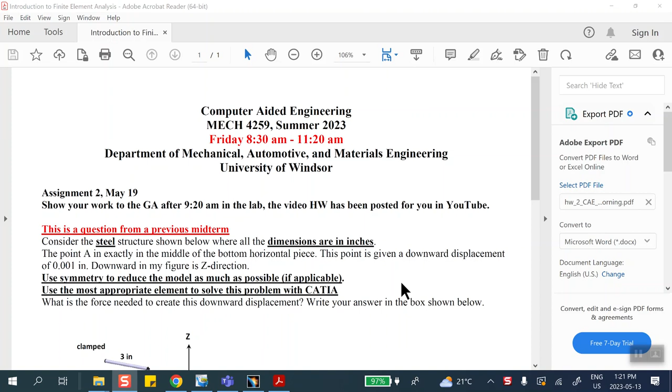So here's the situation: you're given this configuration, and you are told that the ends of the top pieces are clamped.

The middle point of this horizontal piece is being pushed down by a thousandth of an inch. You're asked to use symmetry to reduce the model as much as possible and use the most appropriate element.

As soon as you see this, you should realize that this needs to be done with beam elements, not with solid elements. Do not go and try to create a three-dimensional drawing where you draw the line and then pad it, etc. This has to be done with beam elements, and therefore all you need is the wireframe. Wireframe means a line. That's pretty much it.

Now, when you look at this problem, first of all, you don't know what the force is to pull this thing down. That much we know. We also know that because of the nature of the problem and the loading, this has a plane of symmetry which is xz. So do not model the whole thing. Model only half of this, which means that you're cutting it with the xz plane.

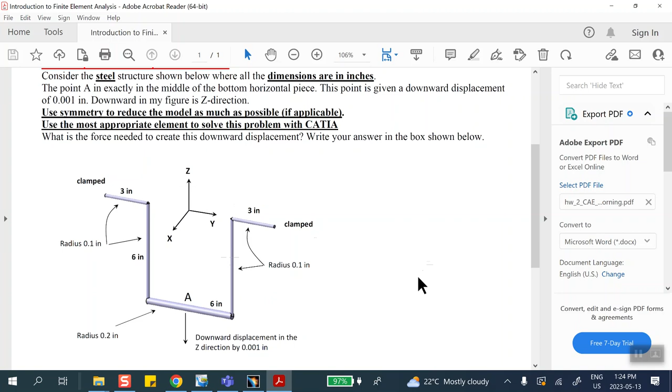Now, in class I told you there are different ways of creating this wireframe. Because this present problem, this entire thing lies in a single plane, for example something parallel to YZ, I can do that as a sketch. But remember, if you do it as a sketch, you have to come back and join it. Do not forget to join. On the other hand, you can also do this thing in space as a line and another line, etc. So that is the other option to do it. We have done both ways in class. I'm not going to do it here.

This particular problem, I'm going to do as a sketch. If you want more practice, go look at homework number 2 for the afternoon class, where this structure is not all in the same plane. So there you have to go and create the wireframe in space. All right, let's go ahead and do that.

I will model only half of this, instead of modeling the whole thing and then trying to cut it. So on that vertical plane, I will sketch this thing that essentially is half of that geometry that you see there.

Now I noticed that, for example, inadvertently I put this thing to the left of that. That's okay, I'll fix it. That point, control this point, I'm going to make it coincident, etc. All right, let's go ahead and put some dimensions here.

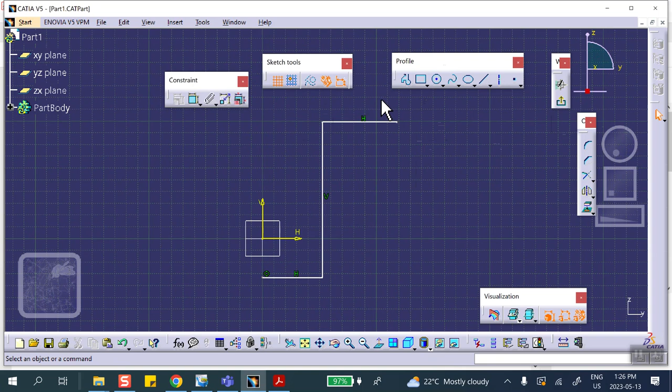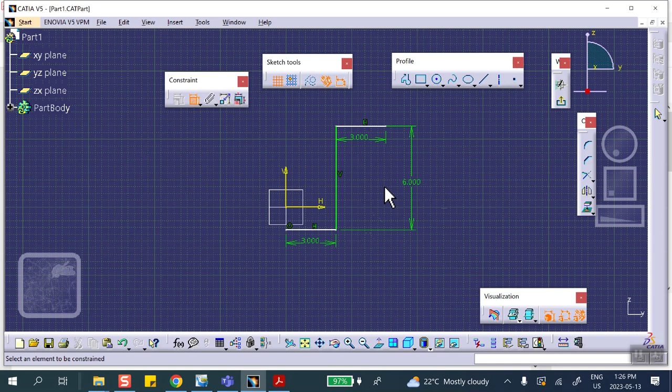So let me see. This is 3 inches. This is 6 inches. And this is also 3 inches. Very good. Now the reason these are white is because this is not fully constrained. I really don't care as long as you do the problem. I don't insist that everything be fully constrained, but anyway, that's what it is. So exit.

This is generated in a sketch. In order to be able to do this with beam elements, you have no choice but to join that sketch, otherwise you won't be able to mesh it. And I want to remind you how we did the joining.

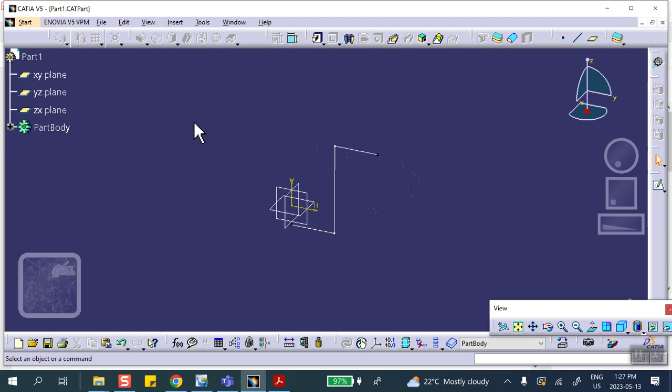The joining cannot be done in part design. You either have to do it in generative shape design, or you can do it here. So start mechanical design all the way. Let's see, third from the bottom, wireframe and surface design. This is the baby version of generative shape design. For our purpose we can do it here, but I'd rather take you into generative shape design.

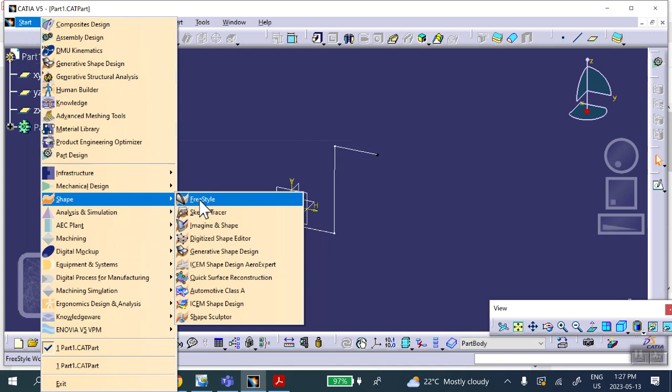Let me see... under shape, yeah, shape workbench. The fifth one from the top says generative shape design. You click on it, and all you need to do is get the operations toolbar.

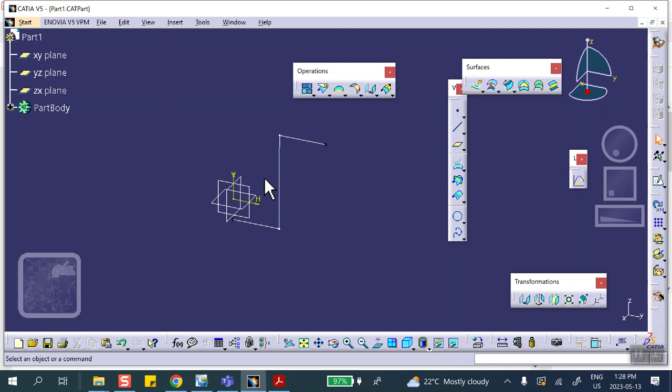This is the operations toolbar, and the one on the very left is called join. You have to do that, otherwise you won't be able to mesh this with beam elements later on, since it was done in a sketch. You click on it, select that sketch, and that's pretty much it. Nothing else you need to do here.

Now we can go to part design if you want and apply material, or we can do it here. It really doesn't matter, so I'm going to do it right here. Apply material - this is made out of steel - apply it to the part and close it.

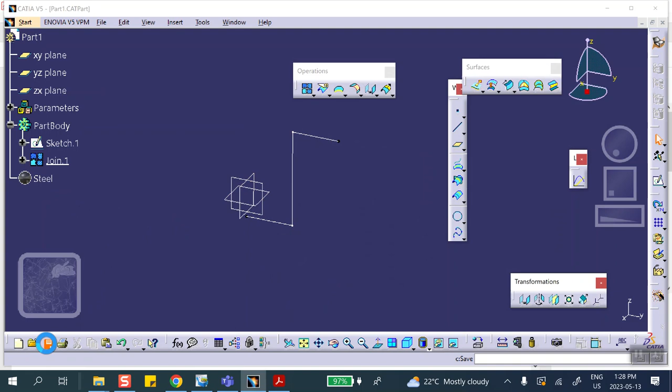We save this by clicking on the floppy disk, and then we're going to go to the usual analysis and simulation, generative structural analysis. You click on it. It is a static analysis that you're doing.

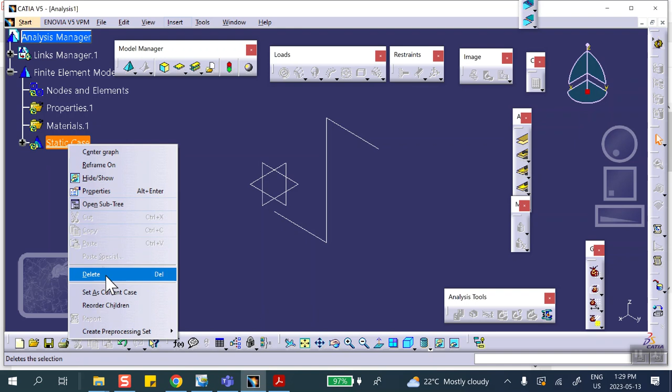Remember, I told you that if you accidentally delete this static case line, you can put it back in as an insert. I don't have it here, but let me do that. Let me on purpose delete this for you - I don't want to do that, but on purpose I'm going to. Then you can always say insert static case. The reason I can't do it right now is because I haven't meshed it properly. That's what it is, so undo this.

Just be careful not to delete this. So first thing we're going to do is mesh it with beam elements right there. Under model manager, where the traffic light is - under the model manager - you expand the icon to the left and use beam element.

Remember, CATIA, when it sees a solid object, meshes it with these elements. There is no solid object here, so you have to do it yourself. You click on it, select this, and notice that it selects the entire thing because we joined it.

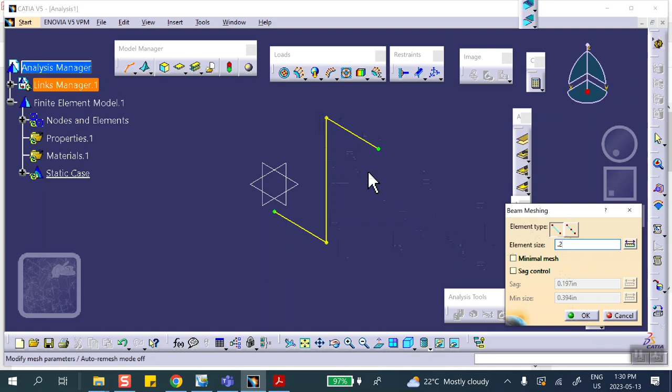You say okay. Now would you like to see the mesh? The usual thing, you put the cursor here. Notice that the beam element is created, but it doesn't show it to you. Right-click, mesh visualization, nothing fancy. If you put the cursor, you see there are element numbers and node numbers. The one in the middle, let me zoom in further - this is element number 36 going between node 39 and 38, etc. Nothing fancy. Deactivate this.

The next thing is we want to put a cross-sectional area. Now, because it's a circle, you don't need an orientation point. How do we do this? This is the 1D property. In the model manager, 1D property, you click on it. It asks, what is it that you want to put cross-section on?

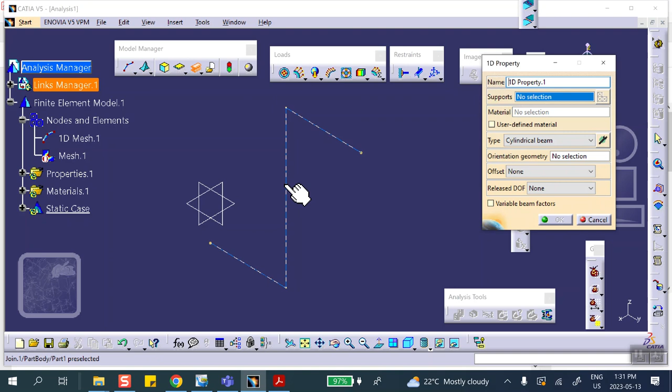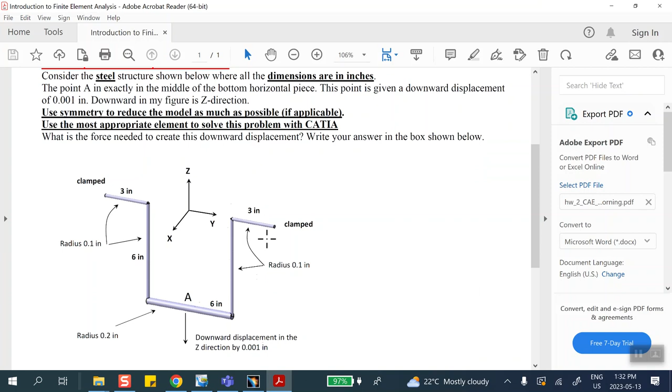We select this, and because it was joined, it's going to put the same cross-section on all of them. It's a cylindrical beam that I want. Click on the wrench and put down 0.1. Notice that the cross section of these two pieces is different from that - the radius here for these two pieces is 0.1, and for this piece is 0.2. So the way we're doing it, we put 0.1 on everything, and then we come back and make a change for this bottom one.

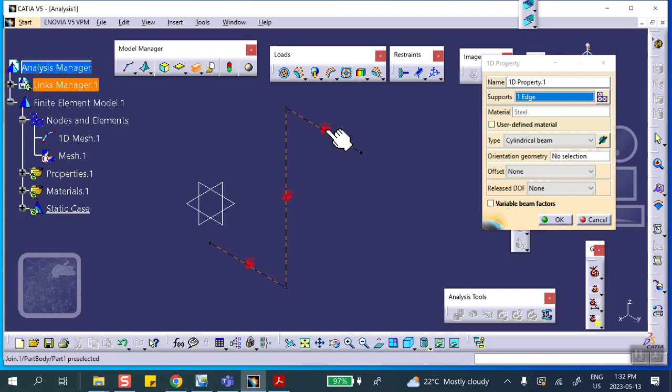Okay, so 0.1 on everything. We notice that we can close it, by the way, because the cross section is a cylindrical circle, and there is no orientation point needed. We say okay, and if you zoom in, you can see the circle right there, and it's the same size circle.

However, we know that this has a different cross section - the radius is 0.2. So how do we do that? We put the cursor, open up the properties toolbar, the properties branch right there. Put the cursor here on the 1D property, right-click, and towards the very bottom it says local 1D property. You click on it, it says, where is it that you want to change? It's this piece that I want to change, and what radius do I want to give it? I want to give it the radius of 0.2.

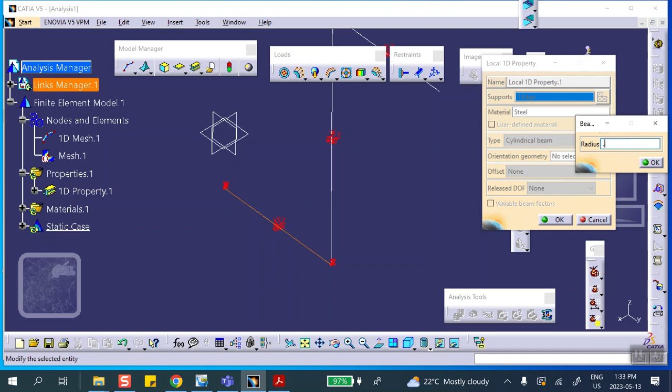So now you can see these two pieces, this one and that one, have radius 0.1, and this one, because we changed it through the local 1D property, has radius of 0.2. Don't let this thing bother you, because this is what we put there initially, but then we went and changed it, and it put these things there.

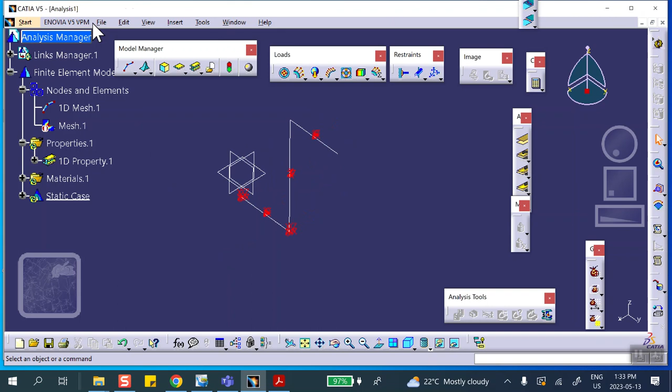Very good. Save the analysis before we run ourselves into trouble in case the power is lost or in case we have to kill the job. So we go File, Save Management, Analysis, Save As. In that same folder, Lab 2, Homework Morning, Analysis 1.

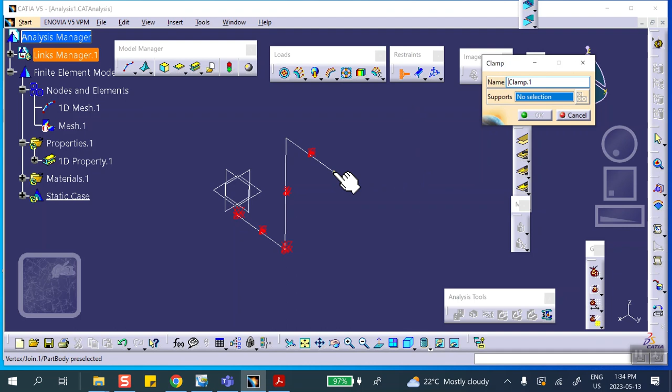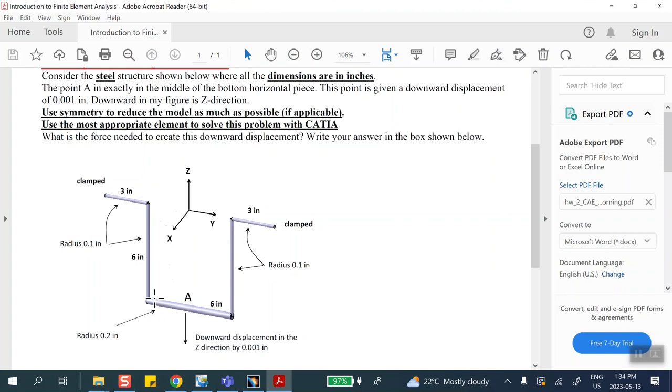Very good. Now, we are told that this point is clamped, so click on the clamp and select that point. Okay, that much we know. We know that this point is on a plane of symmetry. Now, if it's bothering you, I can always hide these properties right there, local property there. So this point is on the XZ plane of symmetry. That means no displacement in Y, and rotations exactly the opposite.

So let's go do that. So we click on this. Okay, and on purpose, let me uncheck all of these. On purpose, I'm going to call this symmetry condition - you'll see, because this is going to help me identify something later on. Symmetry condition.

So no displacement in Y and rotations opposite. So opposite means that if these are unchecked, they're going to be checked now. Obviously, this one is checked, this is going to stay. This is symmetry condition for beams.

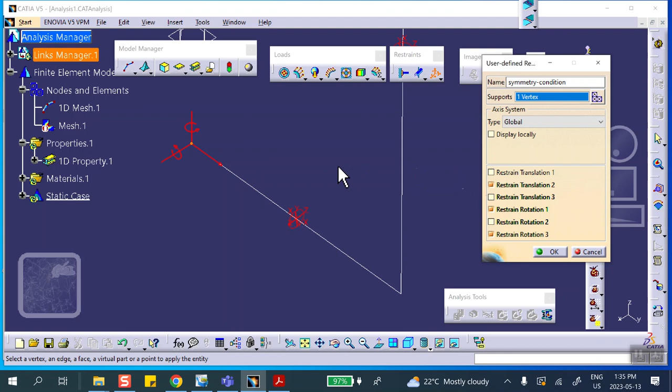We say okay. Then I want to take that same point and pull it down by a thousandth of an inch. So in order to remember, in CATIA, if you want to give a non-zero value for displacement and enforced displacement, first you have to make it 0, just so that I don't mix these up, because this one is for symmetry.

First thing, I'm going to select that same point and say displacement in the direction Z equal to 0. And on purpose, I'm going to call this thing pulling down. You can see that - I don't want to mix these up because it's a recipe for disaster.

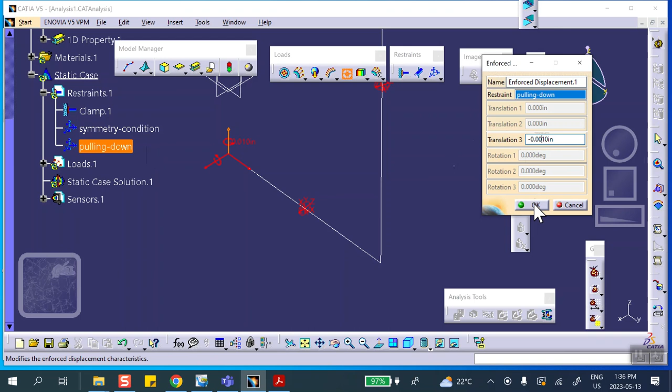You say okay, now I go and change this thing to 0.001. So go to the enforced displacement in the loads toolbar right there. In the loads toolbar, you click on it, it says where is that thing that you want to change? I go and select the pulling down, and I put negative 0.001. Okay? Negative 0.001. We say okay.

Save this and run it.

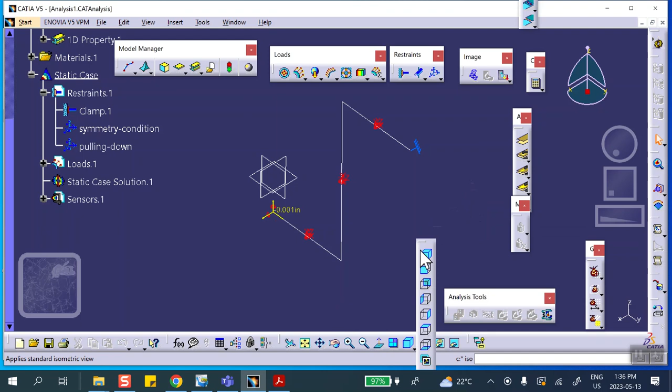Nothing fancy. Let's look at the view from the front, by the way - this is a 3D problem, so anyway, look at the front. Look at the deformation. Yeah, you expect something like that to happen, right? Yeah, because this is on a symmetry plane, it doesn't go to the left or doesn't go to the right, etc. If you want to know the values, click on it.

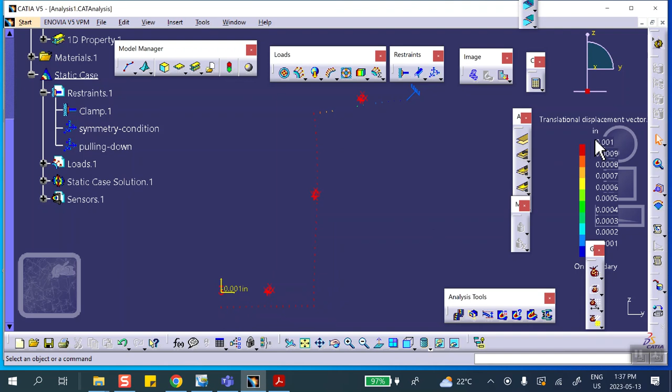Notice that we applied 0.001 here, right there. And then for the other ones, if you want to change the color rendering, you go average ISO, and there we are. Okay?

Now, remember, in CATIA, you cannot display stresses directly. You can display the principal stress, and the only principal stress that it will give you is the axial principal stress, which is kind of useless for bending purposes. You see that? It'll give it to you - it'll give you one component of stress, and it's going to be the axial one. Okay? Yeah.

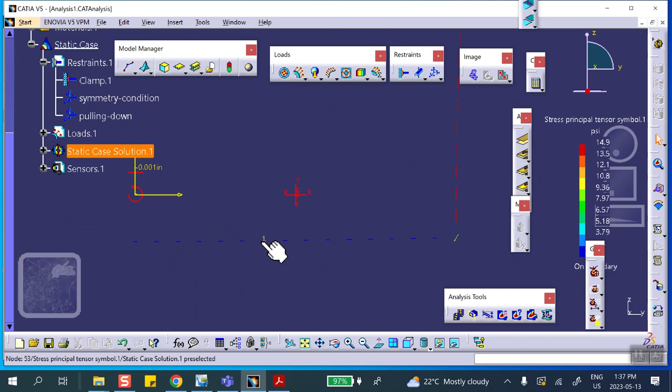Good. The rest of it is here. Notice that this one has pretty much, let me see now - this one has a very small axial stress. See that?

Now, mainly because it's thicker, right? It's a thicker beam. Let's deactivate this.

The last thing is, remember, this was a test problem. We gave you a box like that and said write down your answer in the box. What is the force needed to pull this point A down by a 1,000th of an inch? You have to write the right number here.

Now, so we go put the cursor on the sensor. We go to the second last, then reaction sensor. It says, okay, where is it? Well, it's the pulling down thingy, right? And you say update, and you're going to get a point, almost half a pound.

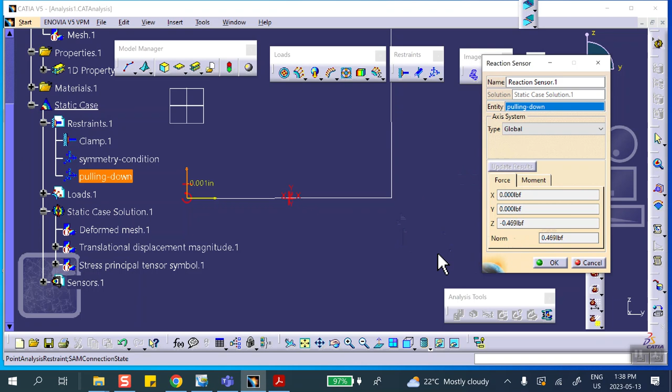0.469 pound. So first of all, don't cancel this because I will not be able to see that. Let me show you. Cancel it. It's not going to appear here.

Let me try it again. Right click, reaction sensor, pulling down, update, 0.469. Say okay. Don't cancel.

Now, because when I mark your paper, I can go here, double click on it, and find out where you got your number from. Now, the number that goes in this box is not what's there. It's double of what's there. So you can write 2 times 0.4, whatever it was, 2 times 0.469 or 96, I can't remember.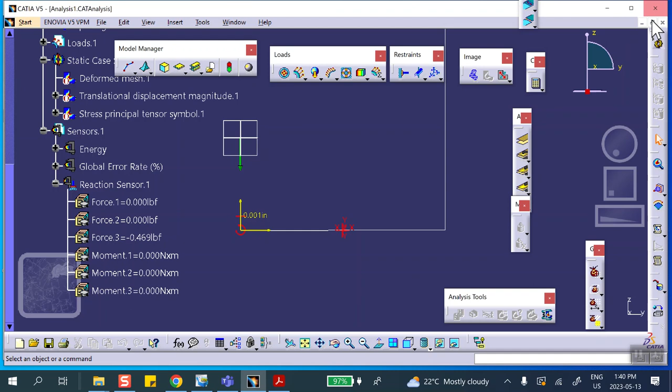First of all, I'm going to kill this join. I keep this though, okay? So what I'm going to do is go to... on purpose, I am going to actually redo this. How about that? Yeah, on purpose.

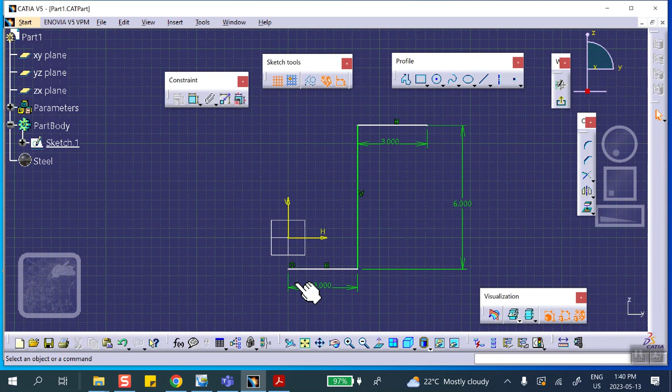So as a matter of fact, let me delete this join. Let me go to the sketch. There's my sketch. And on purpose, I'm going to draw that as a full line, okay? So make this thing 6, there. And I do the rest of this.

The rest of this I can just mirror. So this line, control that line. Control that line. I'm going to mirror it. Let's see if we can find the mirror. Is this the mirror? Yeah, mirror it with respect to that.

Because I'm just too lazy to do it. Now notice that the reason I actually extended this line, I didn't want to break there, is because I don't want to have a point at that location. Okay? That on purpose complicates things a little bit.

If I had done just mirror of everything, including that piece, then there would have been a point here that I could have used later on. But on purpose, I got rid of it.

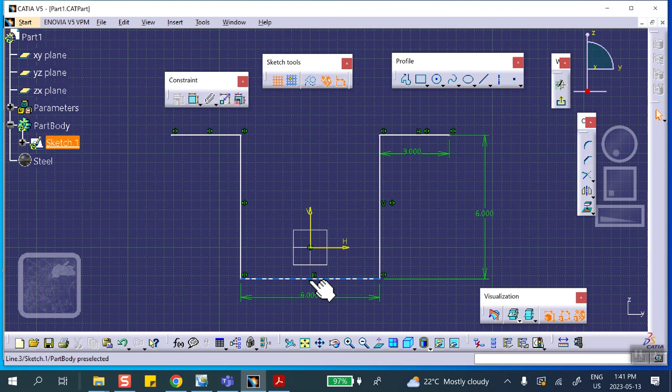Exit. Okay. Let's join it. Still have to join. Material is already there. Okay.

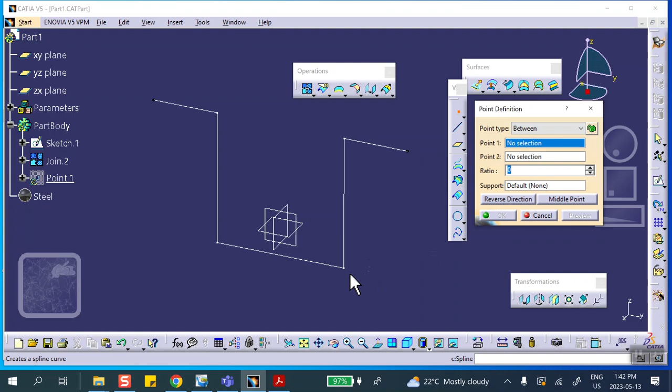Now, for a reason that may not be obvious to you, let me create a point exactly halfway between these two, a point on this curve, exactly halfway. So I'm going to create a point, and the way I'm going to do that is between this point and that point, exactly middle point, and there we are. That may not be obvious to you, but you'll see why in a minute.

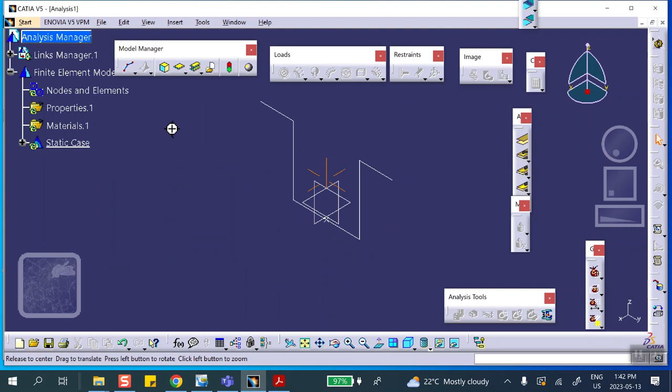So now we're going to go to generative structural analysis. Okay. And mesh it. Mesh this. Because we joined it, everything is going to be meshed. And we say, okay. Now, if I double click on that, if I double click on this...

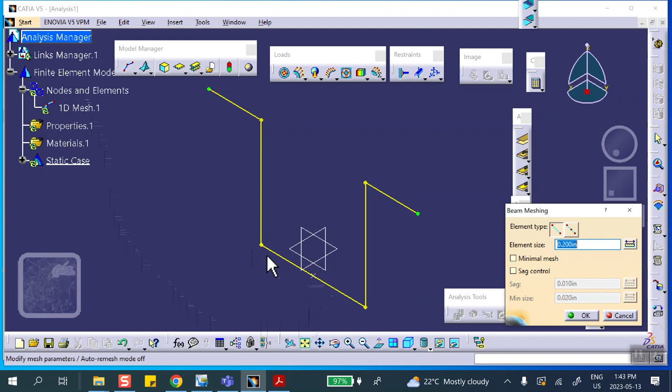The problem is that this point may not have been a node. You know, like I put a point exactly halfway between these two on that line, okay? But there is no guarantee that this point is going to be a node.

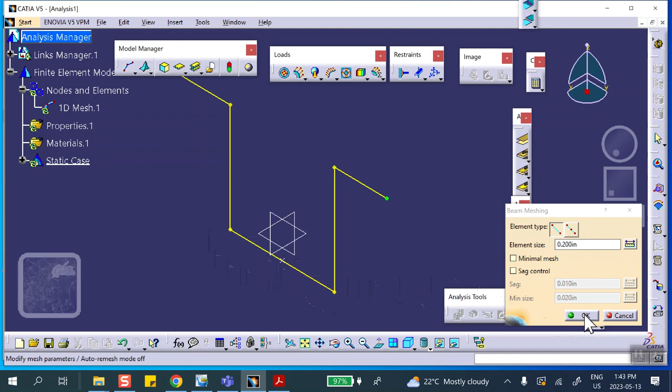Now, there are different ways of fixing this. One of them is the following. Let me cancel that, okay? And so notice that although I have...

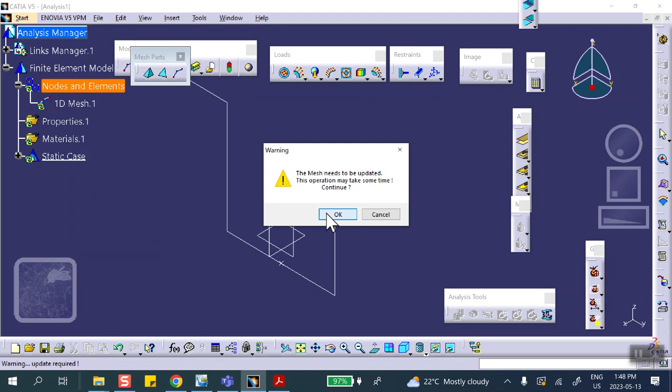Meshed this thing, let's look at this thing again. There is no guarantee that this point is one of these nodes. In fact, to convince you, let me do the following. Let me go and display the part. And I'm going to hide this line. If you go close enough, and you put the cursor there, it just happens because this point was exactly in the middle. There seems to be a node exactly in the middle. The problem is that this point is not a node.

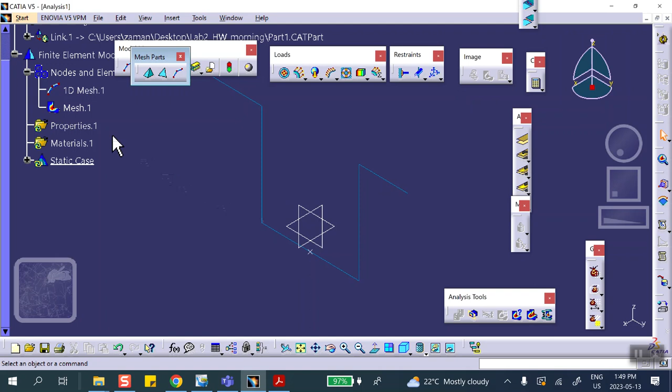It's just literally a geometrical entity. So here's what I have to do. If you want to make sure that this point is a node, unfortunately, you cannot do it in generative structure analysis. So what I'm going to do is I'm going to delete my element right here. Delete the element. Okay? So you have to do the meshing not in generative structure analysis.

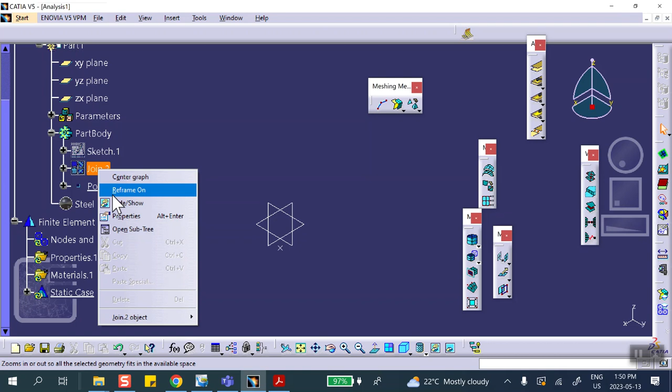You're going to go to the advanced meshing tool. You'll see why. Let me just display my join, by the way, so that you can see what's going on. There we are. Okay. So I go there, and there is this icon here, which looks just like the one that we use in the generative structure analysis. You click on it. Notice that there are more options down here. I can select that join, no problem.

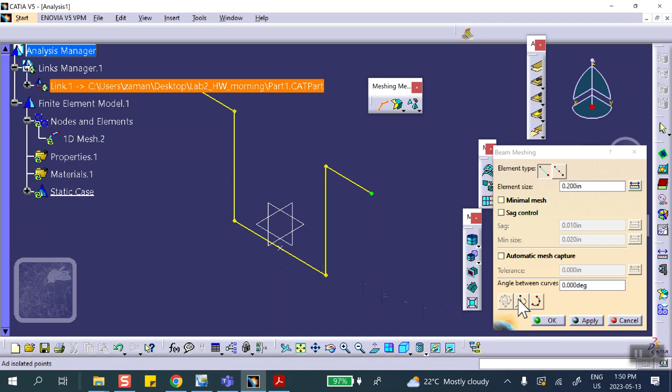But then I'm allowed to add a point so that it becomes a node. So I'm going to click on this. See that icon? You click on it and it says, okay, where is that point that you want to include in your mesh as a node? So it's right here. I am guaranteed that there's going to be a node there. Guaranteed. Good. And then say okay.

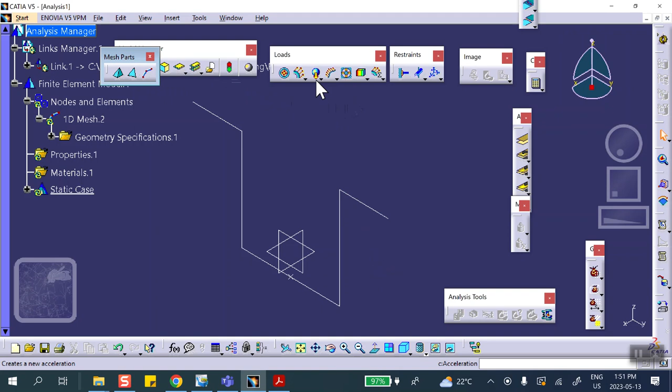The rest of it is just like before. You go back to the generative structure analysis. That's what the advanced meshing tool is, doing things for meshing purposes that cannot be done in the generative structure analysis. What's the rest of the stuff? It's identical. So I'm going to put, first of all, 1D property on that entire thing. Remember, it was radius 0.1.

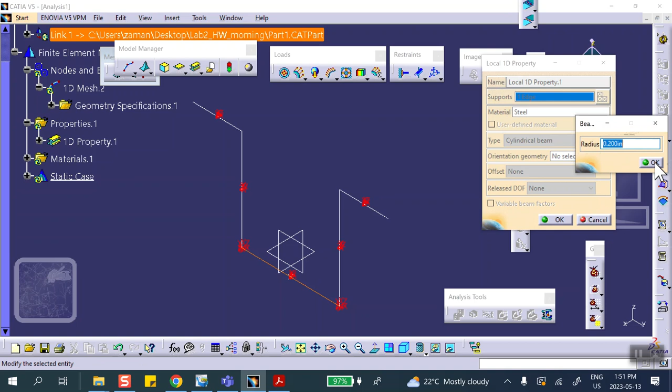And then I'm going to put the cursor on the properties line, right there. Right click, local 1D property. And I'm going to select this line. Now the radius is 0.2. It remembers these things because we already did the problem once. Say okay. The rest of it is these endpoints. I'm going to clamp, and clamp. Notice that I don't have to worry about symmetry conditions here, but we have to give it a downward displacement.

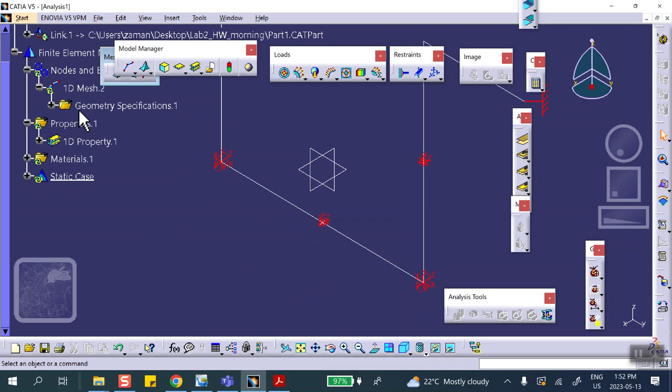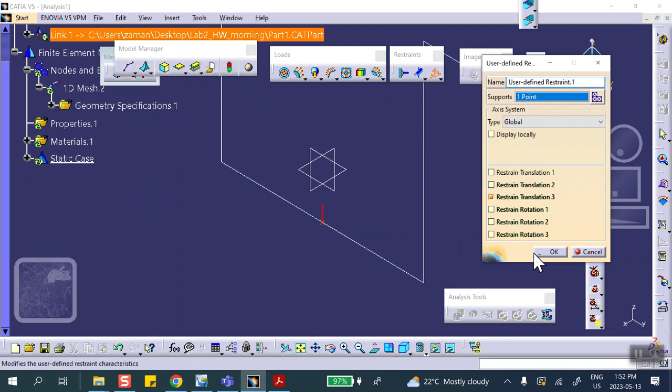Okay, so let me hide the property so that it doesn't block my view. And I'm going to hide this. Well, I can leave that point there because I'm going to have to pick it, and once I pick it, it knows that it's a node. So first of all, user defined on that point in the direction Z. And then I'm going to change it just like before. So there is enforced displacement. You select this in the downward direction, 0.001. Let's run it.

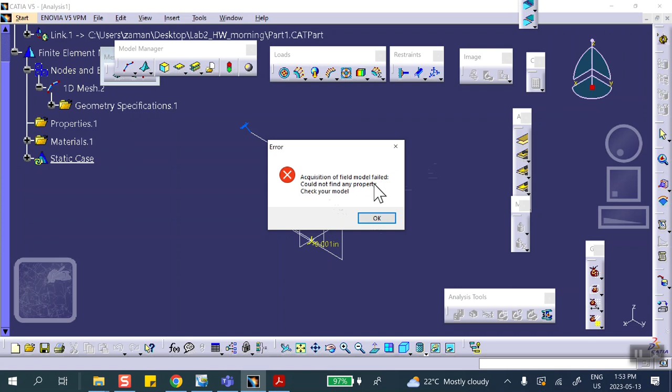Oh yeah. Oh, you know what? Let me see. I must have forgotten something here. Acquisition of field failed. Could not find any property. Let me see now. Oh, property. I remember. I deleted it instead of hiding it. Damn. Sorry. Let's do it again.

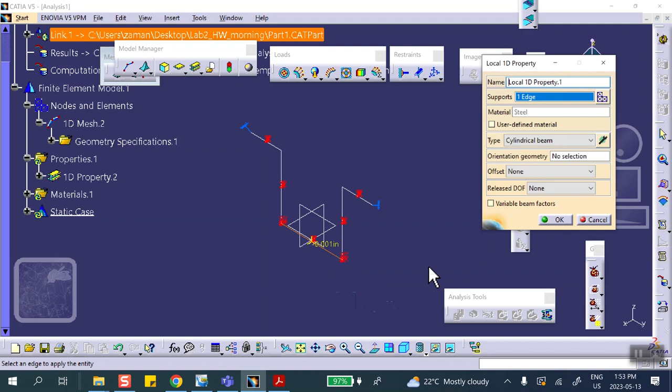So 1D property right there. That's the first step. Remember? And then put the cursor there. Right click. Local 1D property. That line. And it was 0.2. Good. What I did accidentally, instead of hiding it, I deleted it. That's why it said it can't find it, and I can't run it. So let's go ahead and run it now. It'll be fine.

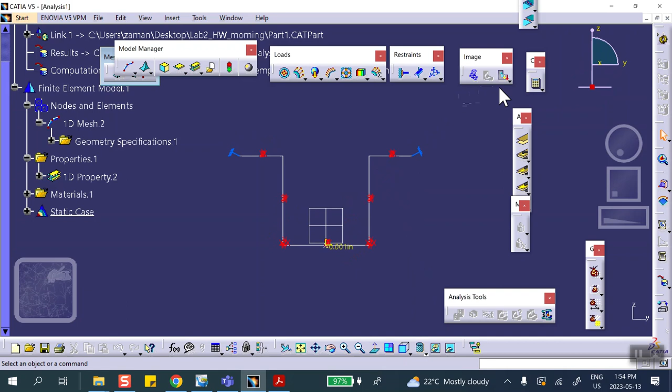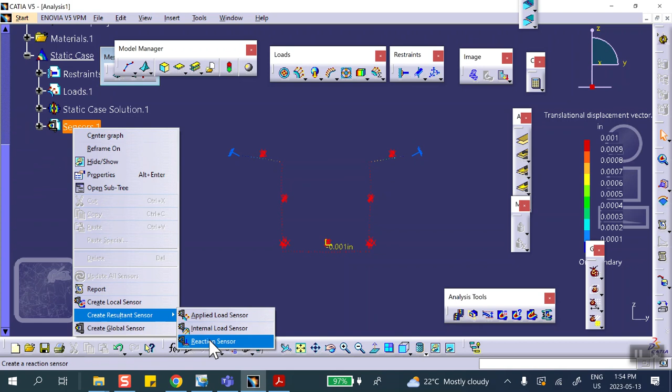Done. Let's look at the view from the front. It's easier to see what's going on. Deflection? Yeah, right. Numbers? Yeah, 0.001, right? Now let's go check the force. Put the cursor there. Right click. Create resultant sensor. Reaction sensor. And it's this guy that we put in there. Remember, we made it 0. So you select this and update. I better get 2 times 0.469, about 0.9. There we are.

So I hope you're convinced that it can be done even without planes of symmetry. It's more work, okay? But remember, on the test, unless otherwise stated, you are expected to use all applicable planes of symmetry.

Okay, that's it. Now, if you're in the morning session, I suggest that you also watch the video for the afternoon homework. They're different. The frame is not in the same plane, so you have to create points and lines and things like that.